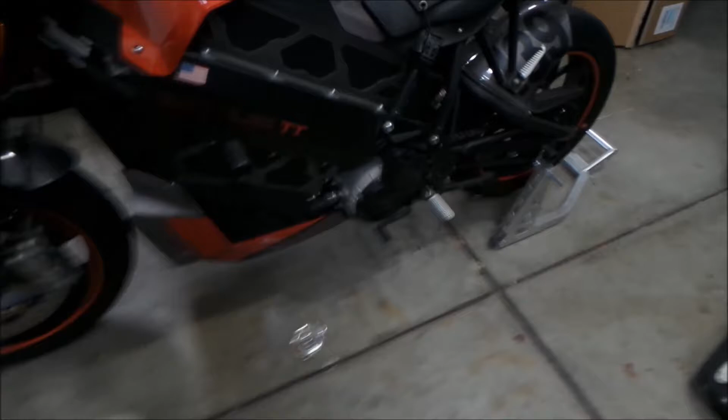The reason I want to just check the level and refill the bike is because my bike has sprung a little leak, leaking from around where the jack is right here underneath. Let me run my finger there... it's pretty dry actually. So the purpose of this video is to show you how to refill or check the level of coolant on the Empulse TT.

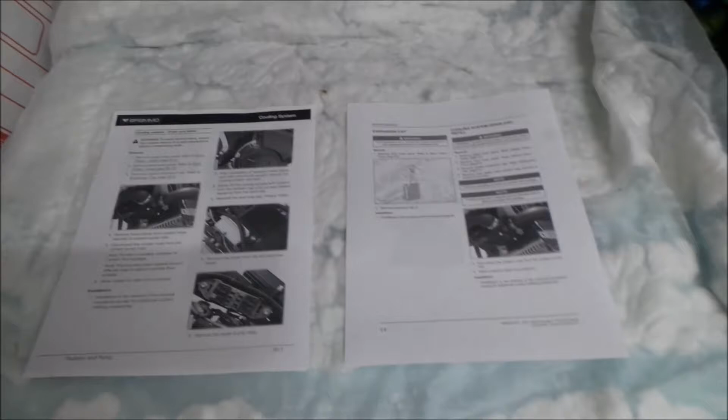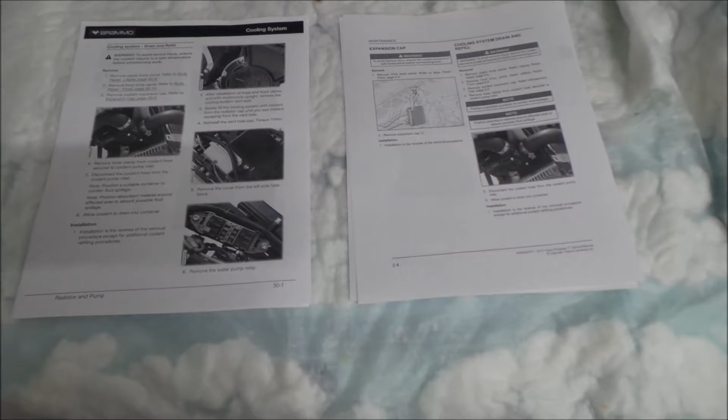So here I've got the Brammo and Victory Empulse service manual pages printed out for draining and refilling. I like the Brammo one better because they have actual pictures as opposed to diagrams. Interesting thing to note, I think this should be the same for both Empulses, the Victory and the Brammo. I'm pretty sure the cooling system is very similar, except for the location of the relay.

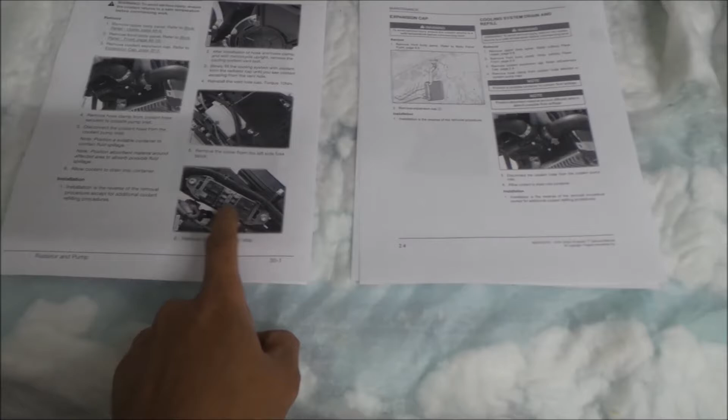I went through the manual, and I think the difference between the Brammo and the Victory is the location of the fuse block. The fuse block is on the side of the bike here, and on this one, the fuse block is on the top of the bike. At least I think it is, that's what it looks like.

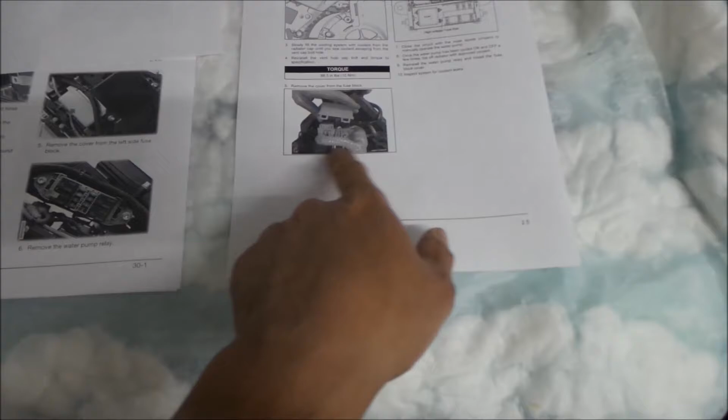Anyway, we'll figure it out when we remove the body panels. The instructions are not the best, I'll tell you that.

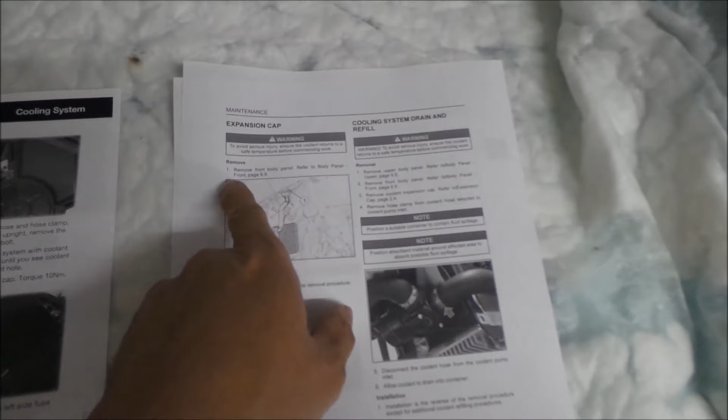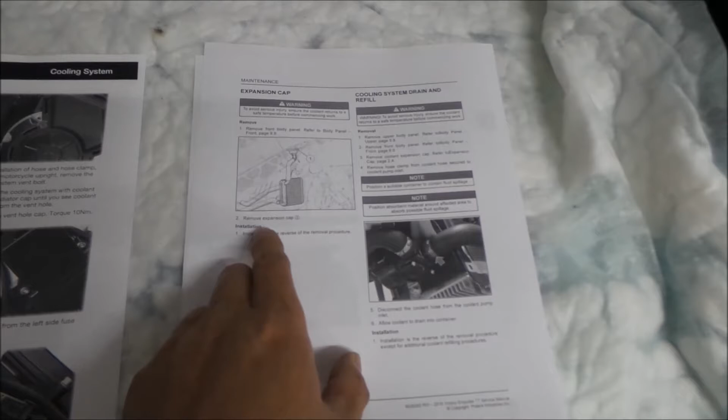The first thing I've done is put the bike on a rear stand, so the bike is level. That's what you're going to want to do first. Then the next step is to get to the expansion cap. That's actually the first part of the maintenance, and that's probably pretty much all we need to do, really just take that cap out and see how much coolant is in there.

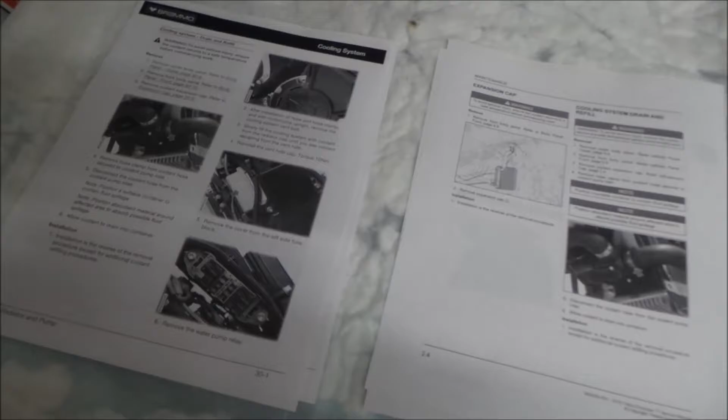And the Brammo manual doesn't tell you how to take it out. It's kind of like, it doesn't actually explain. That's a good question. Well, that's interesting, yeah, it actually doesn't tell you how to take it out. That's interesting.

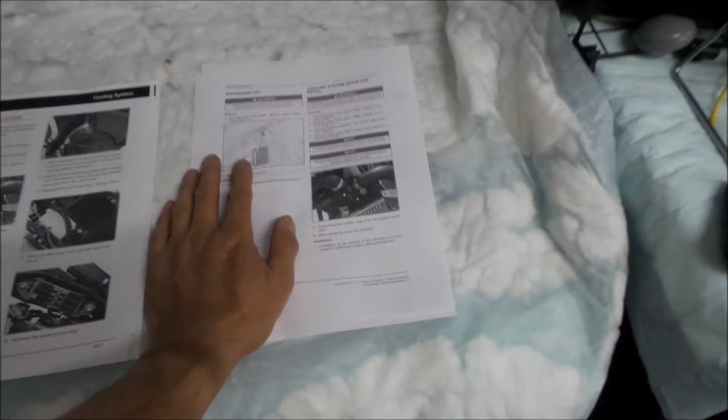Okay, anyway, that's why I printed out both of them, so we can look at them both. One of the things we're going to have to do is get to the expansion cap. So part of the drain and refill process, you've got to remove the coolant expansion cap. To get to the expansion cap, you've got to take the front body panel off.

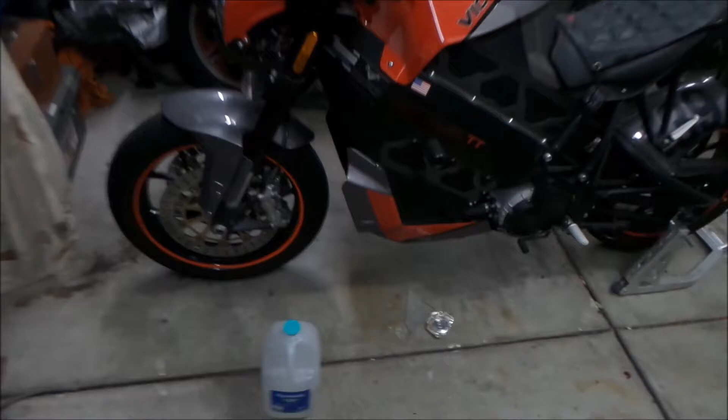I think the front body panel is this one... no, it's this one right here. I think to do that, you've got to take the lower one out, the belly pan. You've got to remove the upper and the front body panel. So that's what we're going to do first.

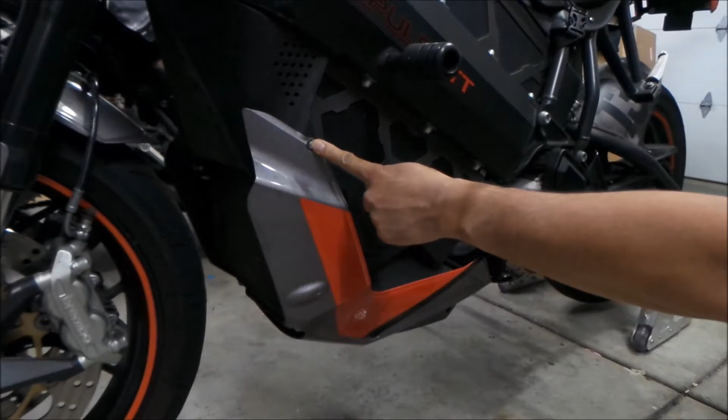To remove the front body panel, you've got to remove the lower body panel first. So I'll show you how to do that real quick. To remove the lower body panel, there are 4 screws: one in the front here, one underneath, and on the corresponding side there are 2 more.

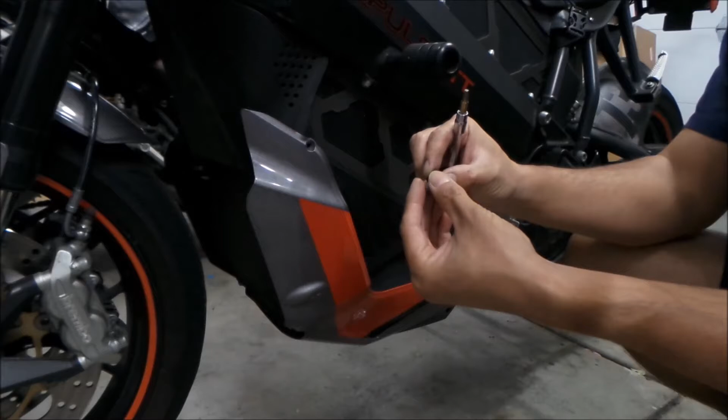I'm using a T25 Torx for this. The Empulse uses these weird bolt sizes and stuff. When you take one of the screws out, there's a little rubber washer that goes with it, so make sure you don't lose that. I probably shouldn't have removed it all the way. There's another one right down here.

Okay, here we are on the other side. Take off those corresponding bolts and screws on the other side. Careful, it may just suddenly fall too. There's also a spacer, and I think I lost it on the other side.

Okay, so there's this spacer here that's on the back of the front cover there, so make sure you don't lose that. I'm going to support it for this last screw so it doesn't just come crashing down.

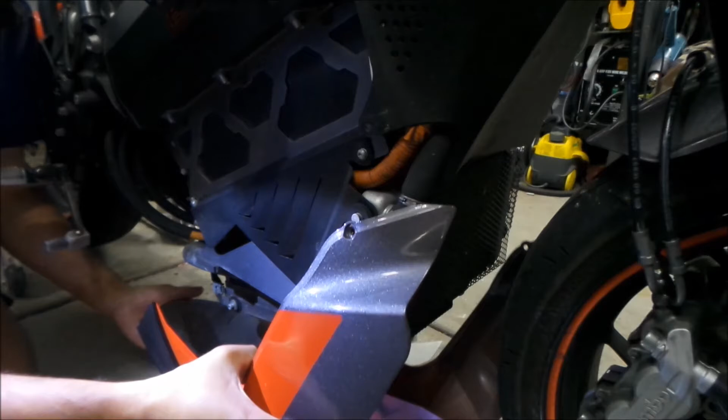Cover should come off. Oh, there's a bunch of stuff in there. This is a good opportunity to clean it out. Okay, I've removed the lower cover.

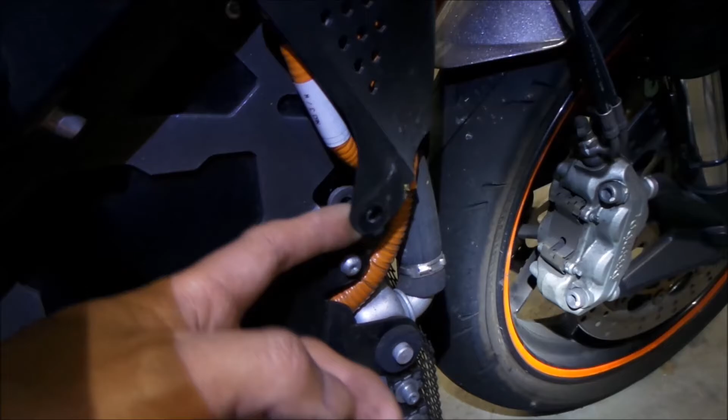So what came out are these two screws, one in the back, one in the front, or one is kind of underneath, sort of. And then there's this spacer. The spacer goes actually behind this panel right here. That's the front panel.

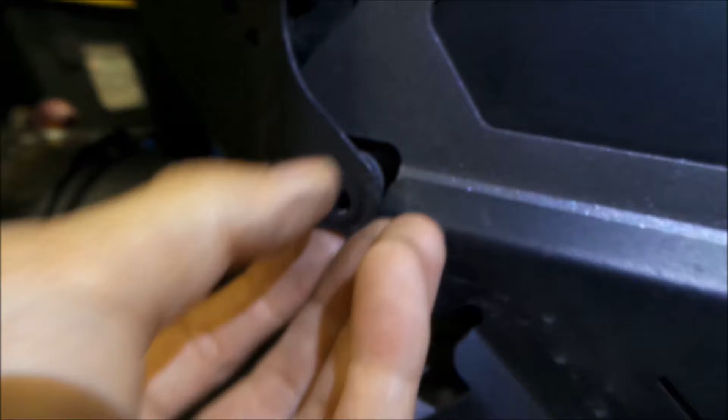So if we go to the other side of the bike, it should have one, right? Oh yeah, okay, this one is still here. So let me take that out before we lose it. So on both sides, that's what you should have: four screws with rubber washers, and then these two spacers that go behind this front part here.

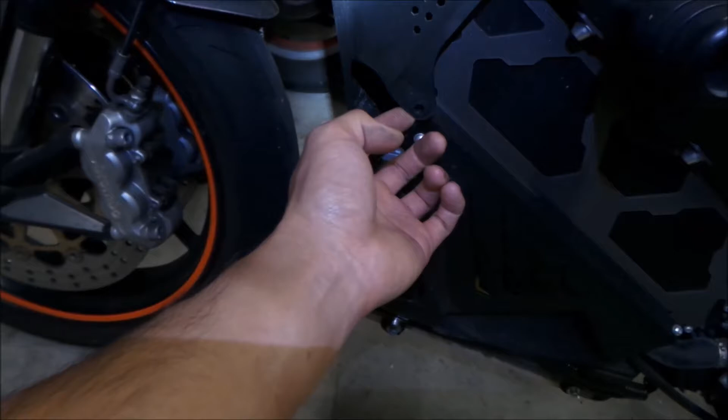Okay, and so we got the lower cover off, so now we can take the front cover off. This is the front cover right here. So now that we've removed the front, I don't know, this is like the lower cover or something, or the side lower side cover, or the belly pan is what you would call it.

This is what it looks like, by the way. It's kind of cool looking. Never actually taken it out of the bike, but you can see it's pretty dirty. A bunch of crap gets stuck in there, so I guess this is a good opportunity to wash it. And you can get a good look at the bottom of the bike, but let's finish taking it apart.

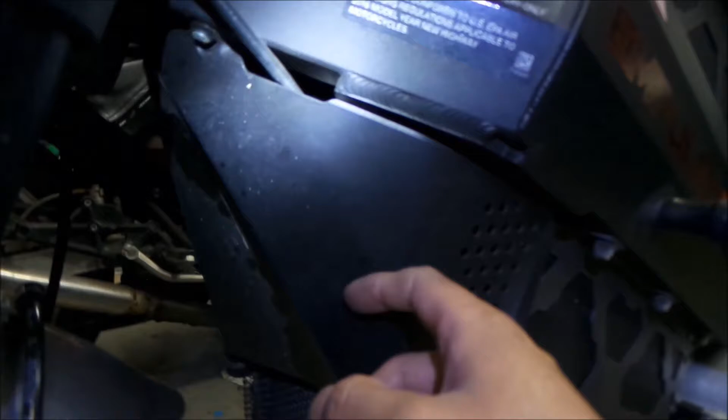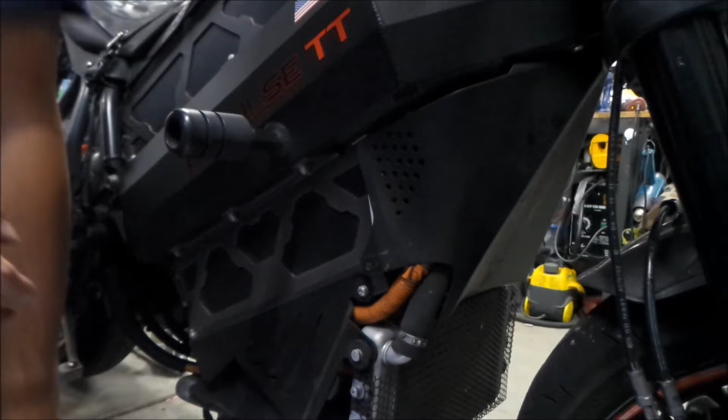Okay, so to take the front cover off, this black plastic piece here with the holes and stuff, we've got to remove these screws right here on the front. We've already removed these back ones, so all we have to do is remove this right here. Okay, we're gonna take our Torx screwdriver and remove that screw.

Boy, there's not a lot of room to work with anymore. My suggestion is use the screwdriver. Oh, this might be a different size. Oh no, okay. Kind of got it. This is kind of the wrong size, it's too long, so I'm just going to take the bit out. I really should invest in like a screwdriver set or something.

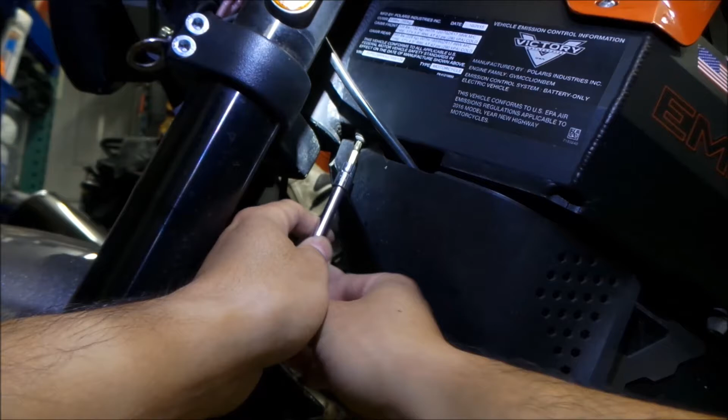Okay, that's one screw out. Let's go to the other side. So for whatever reason, this one is easier to get to, it's easier to find. So I'm just going to use a screwdriver to loosen it. Probably want to hold on to this.

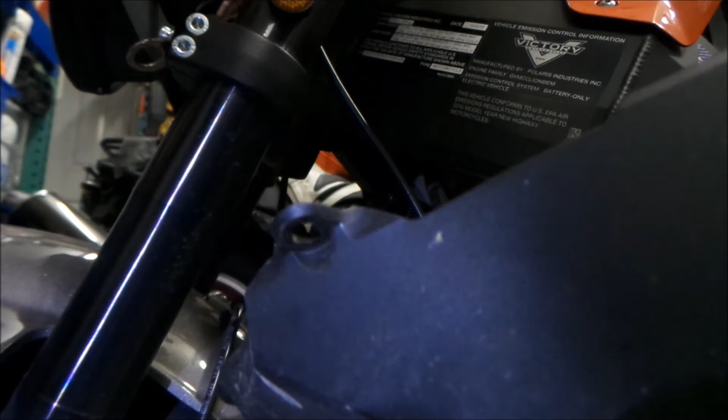Very carefully pull it out. Okay, there it is, it's free. Make sure you secure that bolt somewhere. So there's the front panel right there.

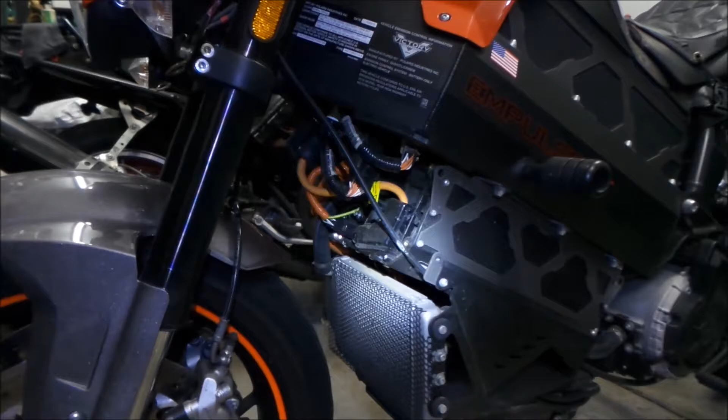Okay, so here we are. So this is, you've taken the lower panel off, and then we've taken the front panel, body panel off. So now we have access to the radiator cap, sort of, kind of.

There's all these freaking wires in the way here, man. I don't know how they expect you to get to it. Look at this thing, it's got like a plug at the end of it. There's a lot of rubbish going on here.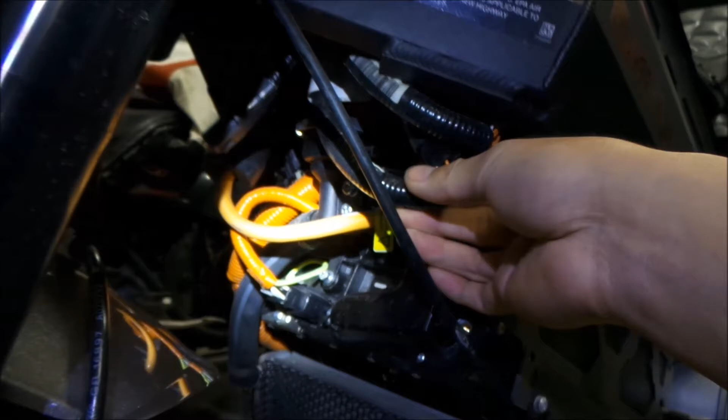But I'm thinking, boy, you're probably going to want to unbolt this. It doesn't say anything about unbolting this in the manual, but it's like I don't see any way to refill this thing unless you take this out and move it that away. Here, let's take a look at it from the other side. But it's like buried in there, it's literally almost inside the frame.

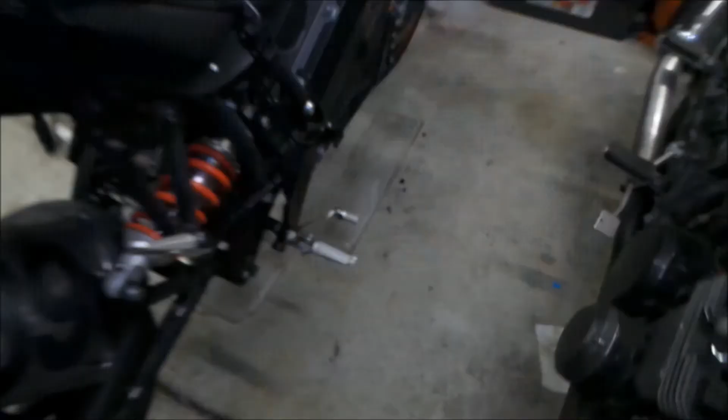Also, before I start fiddling around with the cooling system, I put some drip pans under the bike just in case something drips.

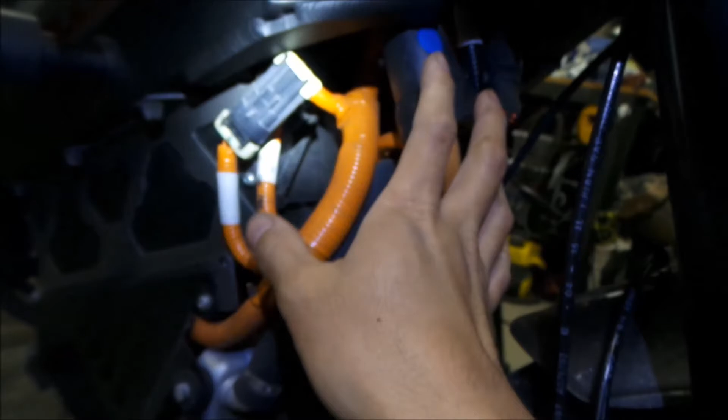Okay, so right here, there's that safety plug, which is way in the way. I think the best thing to do is just unbolt it from here and here. We're not going to be messing with the electrical system at all, so we don't have to disconnect anything, I think.

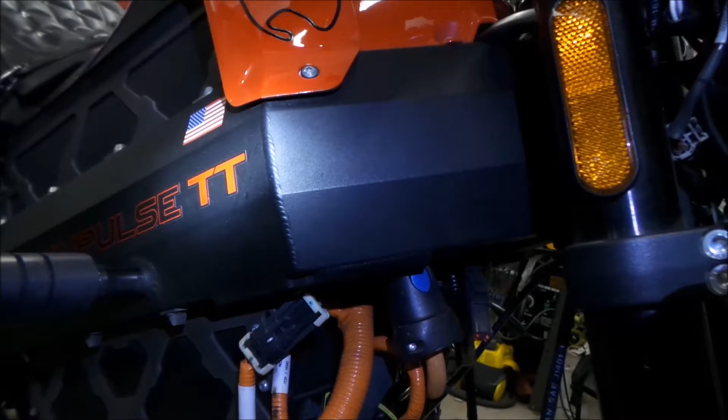So we got to take this cover off right here. To do that, I think we got to take the seat off. I'm going to skip around a little bit here - I'm just going to check the coolant level. I wish there was a way to check this without having to take all this stuff off. It's kind of annoying, but alright.

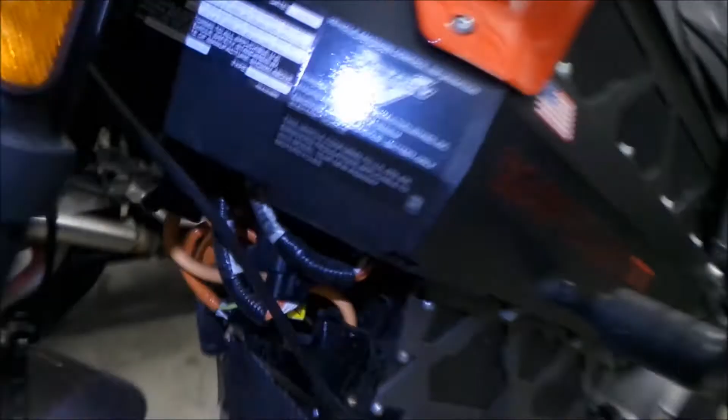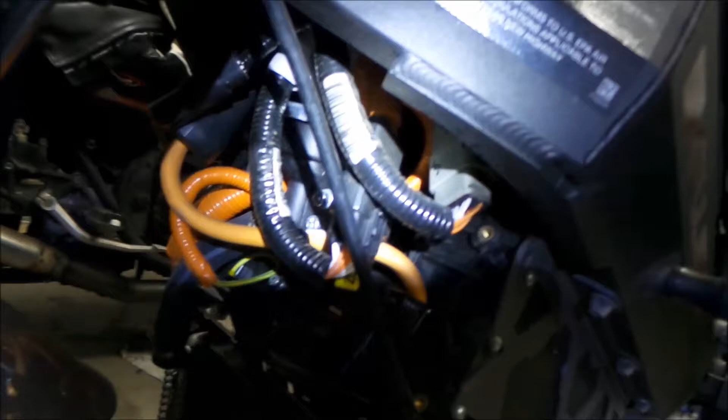So what we're going to do is unbolt the expansion cap, as it's called, right here. The expansion cap goes to the top of the radiator, so whatever the level is in the radiator's thing. It looks like there are two Allen bolts in there - I think it's like a 5mm. That's what it is, so I'm going to go ahead and unbolt this.

This is just the bracket that keeps it secure. I don't know how they expect you to refill this thing if it's back here, you know. It's not the most convenient of designs, I'll give it that.

Got two screws out, so the cap should be free. Hopefully we can just kind of- there's like an overflow thing right here, but there's no overflow bottle. It's a funny thing, I think we're going to move it out here. This hose is keeping it from- so annoying, okay let's just pull it over. Okay, that should be good, we should be able to fill it from here.

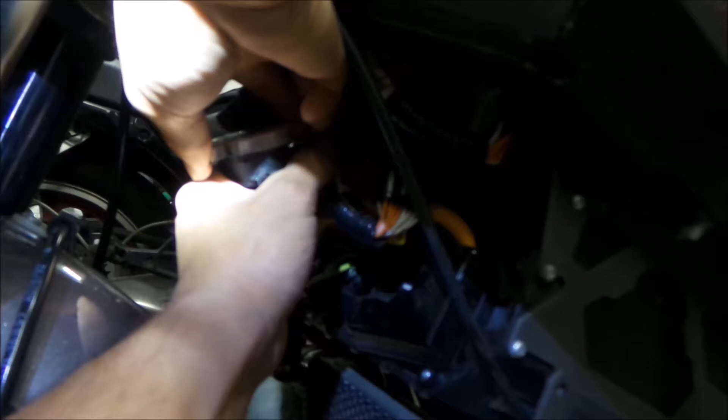Alright, so let's go check the coolant level first before we do anything else. So that's where it is, and I kind of just peeled it out over here. Hopefully this doesn't explode coolant all over the place when I open it.

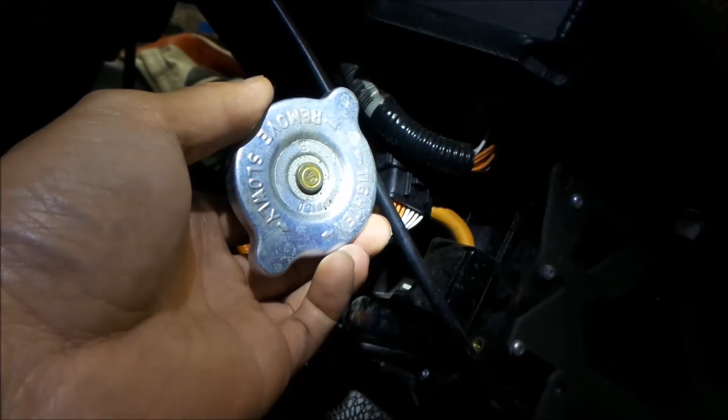Oh, you gotta press down and then turn it a little more. Okay, it looks pretty dry, looks like there's nothing in there. But here's the cap - remove slowly. Made in Mexico, it's a Stant cap by the way, I think it has an S right here.

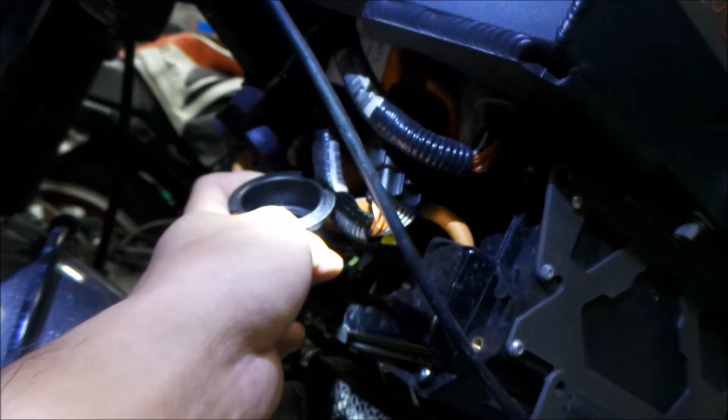Okay, so there's the thingy right there, and it looks like it's empty, okay? So I'm thinking we're probably going to want to bleed it and everything. So alright, before we start refilling it, we'll take the upper body panel off, okay? So it looks pretty dry, there's like nothing in there, yeah I don't see anything in there, but it's an expansion cap, okay.

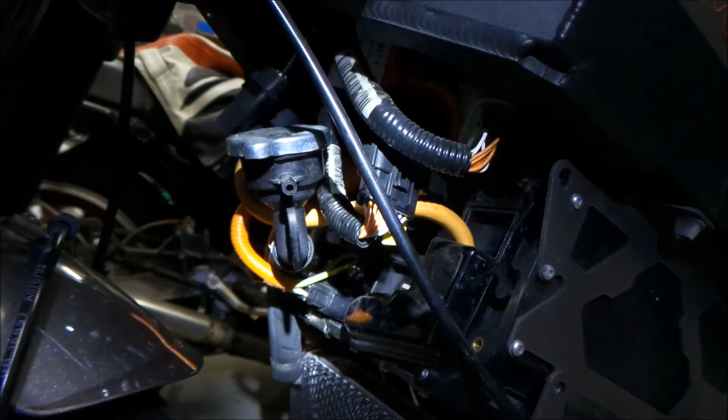So what we're going to wind up doing is refill it as per the manual, and then we're going to bleed the system, okay? And you do that with the water pump.

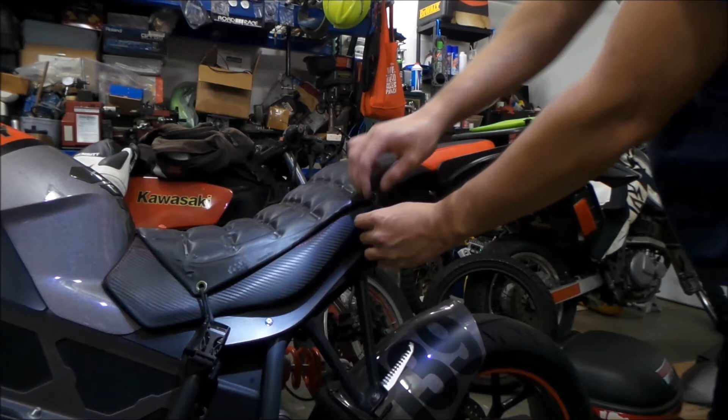Alright, so what we got to do next is remove the seat. Mine has this fancy seat cover, so I'm going to go ahead and remove that. Mine has all these kind of different accessories on it that your Empulse probably doesn't have. I'm going to remove the seat cover - probably won't need this when I go to the racetrack anyways.

Okay, now we're going to want to... I took the trunk off already too. They don't sell trunks for Empulses, so I imagine there's not too many out there among people with Empulses that have them. This is a custom made trunk.

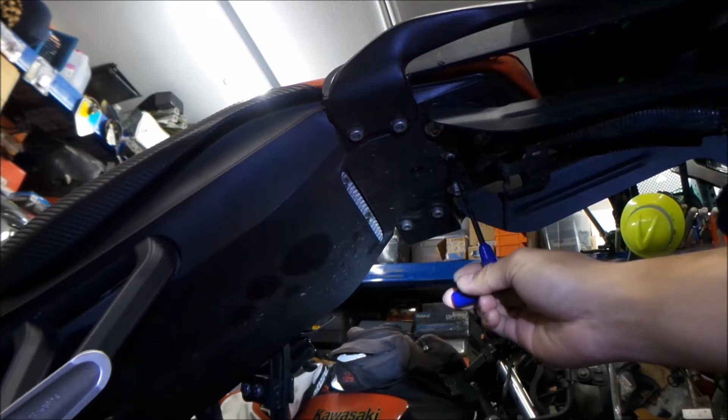Okay, to remove the seat, you gotta remove this bolt right here. There's a bunch of bolts, but there's one that's kind of in the center of everything. I believe that's the one for the seat. All right, with that removed, you should be able to lift the seat off. Set that someplace safe.

Okay, so now we can remove the upper body panels. Marvel at what's underneath the seat - it's a big charger. Okay, I got a handy dandy driver tool. So to remove the upper body panel, you've got to take these bolts out. This one here, and this one here, and I think there might be one underneath. It's been a while since I've taken this out - I've taken it out before, but it was a while ago.

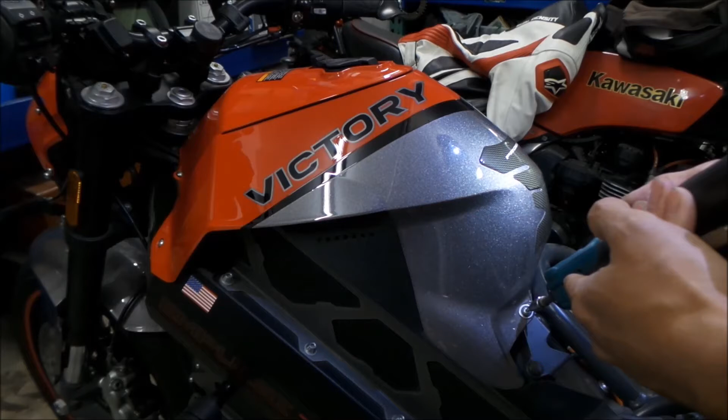Take out this one over here. And there should be another one on the other side. I'm just going to go ahead. So this back cover should come off now.

Okay, so we got two more to take out. There's one here and one on the other side of this, okay? And make sure you're taking the little rubber washers out with it too.

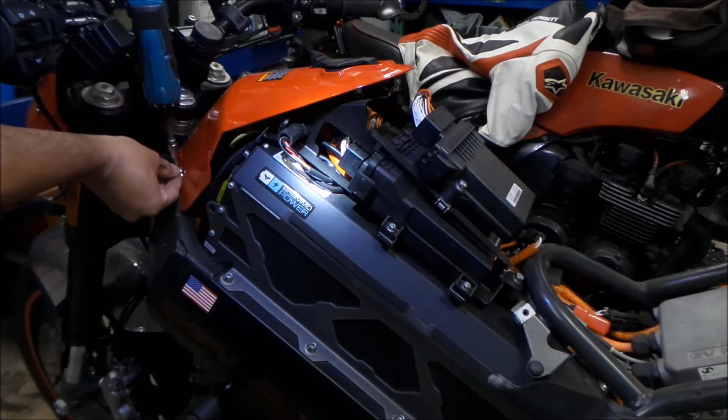Kind of annoying, my bit or the socket kind of touches the body panel. But okay, so that should lift out now. Okay, so now we got access to the fuse.

This is the important part. That's why we have to take all this off, so we can get to the fuse. It's really annoying trying to get to anything in this bike.

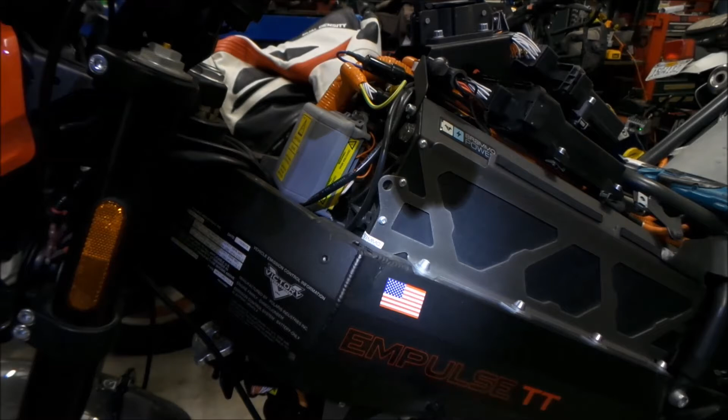Okay, all right, so let's open the fuse box up. So you can see it's right there in the front of the bike. I'm not sure if on the Brammos it's over there. I think on the Brammo it's like somewhere here on the side, in this area here, but on the Victories it's on the very front right here, in front of the upper battery right here.

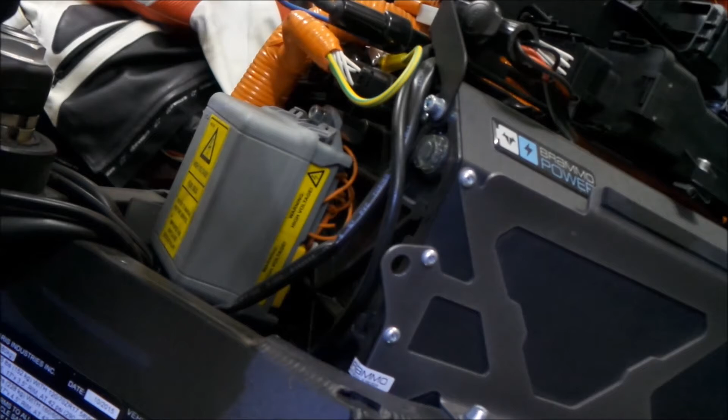Okay, so there's 4 tabs you got to pull up on. I know my hands are in the way, but it might help if you use a screwdriver. I know, like poking metal, moving metal objects around these high voltage wires... oh, there you go. Okay, so once you get the top ones off, you can kind of finagle the ones off the bottom. Oh my God, it is so tight in here. I just cram everything in here.

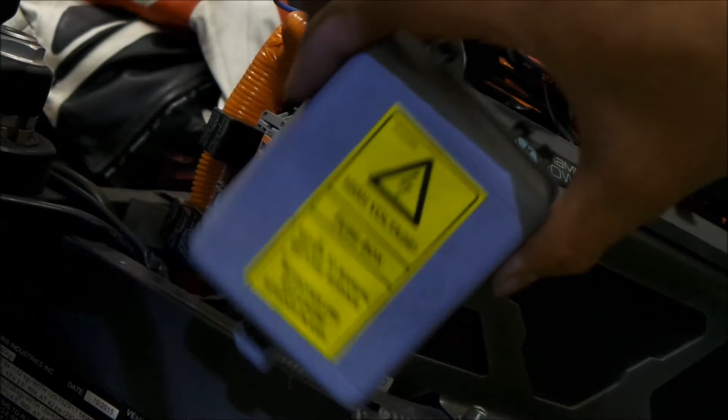Okay, so this is the fuse box cover right there. So here, there's a relay here. We're looking for one relay. Okay, so when we get there, I'll show you what to do. But that was the reason we took all the body panels off, was so we can get to that relay over there. Okay, all right.

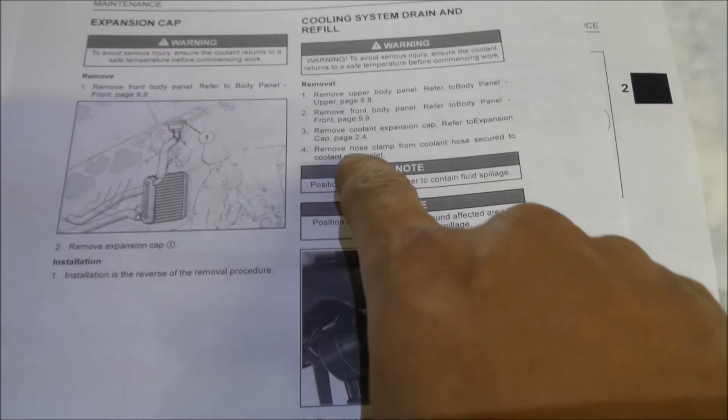So we're gonna go ahead and start filling the cooling system up. Okay, so we removed the upper body panel, the front body panel, and the coolant expansion cap. And then to drain it, you got to remove one of the hose clamps where the coolant pump is. Where's the coolant pump? That's a good question.

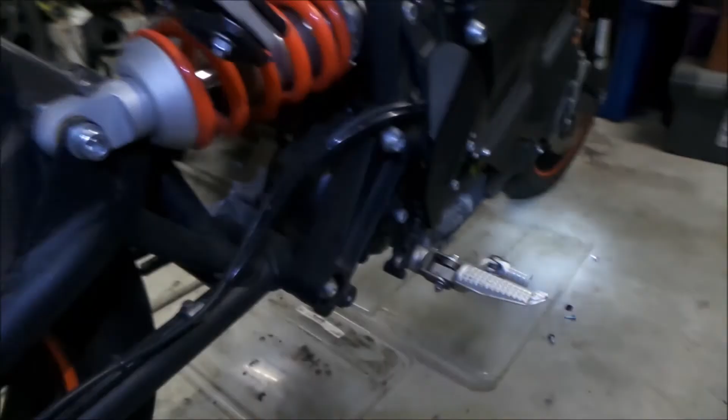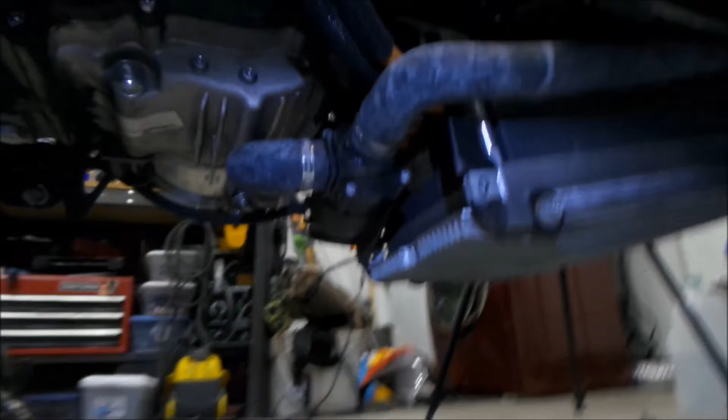Okay, so for future reference, if you would want to drain the coolant off your bike, you would do it by taking this hose off right here, okay? This one - the one that comes out like this, kind of like a turbo. It's a water pump, but it looks like a turbo to me. Basically, that's what a turbo is - it's an air pump. Yeah, you would undo this one.

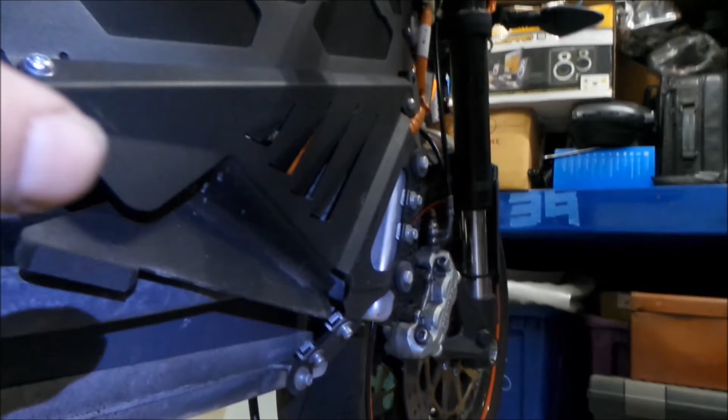You would take this out and then let all the coolant just explode out, because where that actually goes is the lower radiator, the bottom part of the radiator. So all the coolant would just puke out of there, pretty much.

Okay, so I don't know how to undo - I don't know how to work with these clamps. These are some weird kind of clamps. When you do take this out, or when I do take this out, I'm going to replace it with a regular worm gear kind of clamp - the more common clamp. That's what I'm going to say.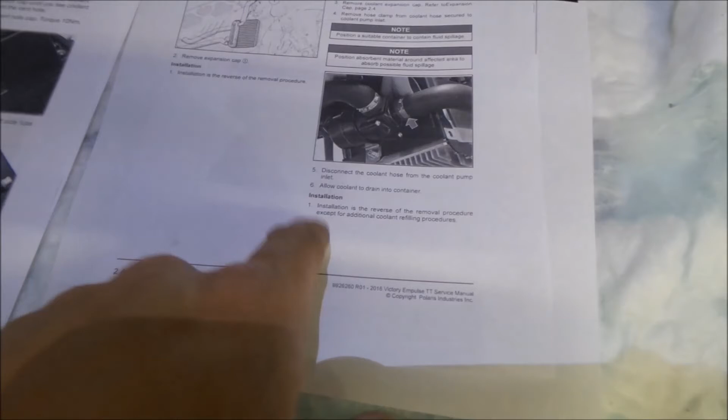Okay, but we're not going to mess with that today. My purpose of doing this video is to fill up the coolant. Since we didn't drain the coolant, we're going to skip to the next part. Installation is the reverse of the removal procedure, except for additional coolant filling procedures.

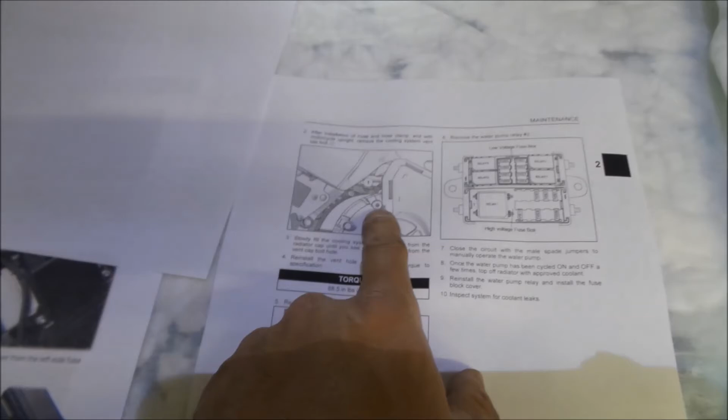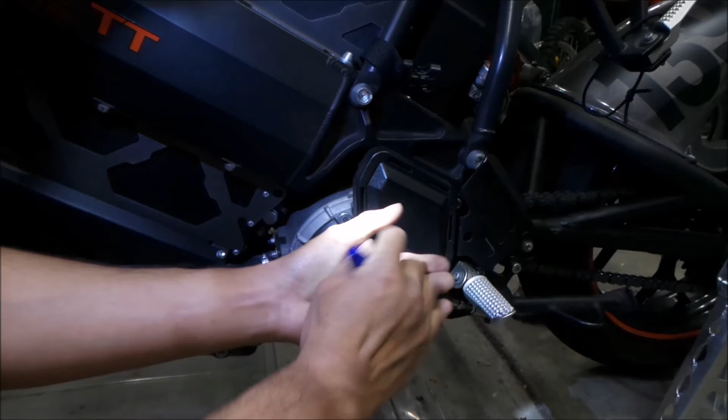So after you put the hose and clamp back in, remove the cooling system vent cap bolt. That's bolt number 1 right there, so we're going to want to remove this bolt. I think it's a 5 millimeter. I would use a T-handle, I got my T-handle here. Let's take this cap, this vent cap, that's what it's called.

Coolant may come out of it, so be careful. Oh, a little bit of coolant came out, it's green coolant. I was thinking of putting Prestone in mine, but it looks like it's full. Yeah, that's what it looks like, it's full because I see coolant on the top. So maybe we don't really need to put coolant in there.

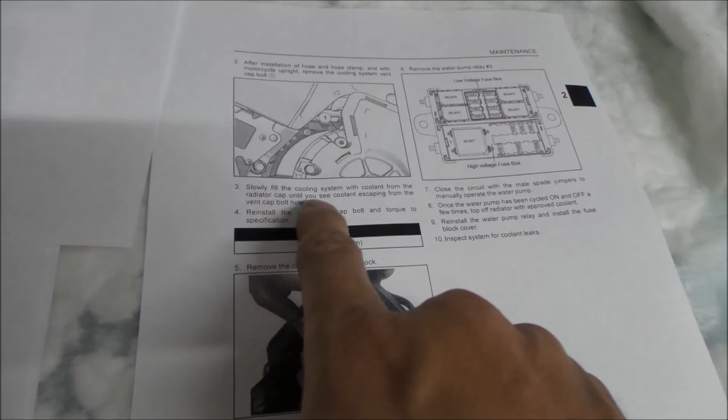Okay, so we removed the cap, there's what the cap looks like. Put that someplace safe. So we're here on step 3: slowly fill the cooling system with coolant from the radiator cap until you see coolant escaping from the vent cap hole. Then you reinstall the vent cap bolt and torque to specification.

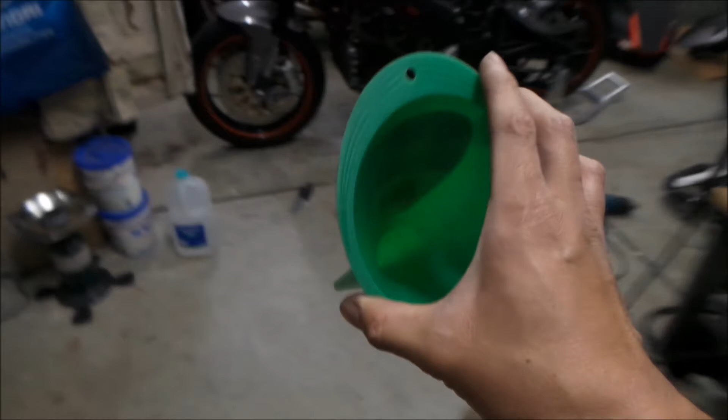So I've got a funnel here, this is what I'm going to use to get the coolant in there. I don't know how they expect you to get the coolant in when it's up in there, you know.

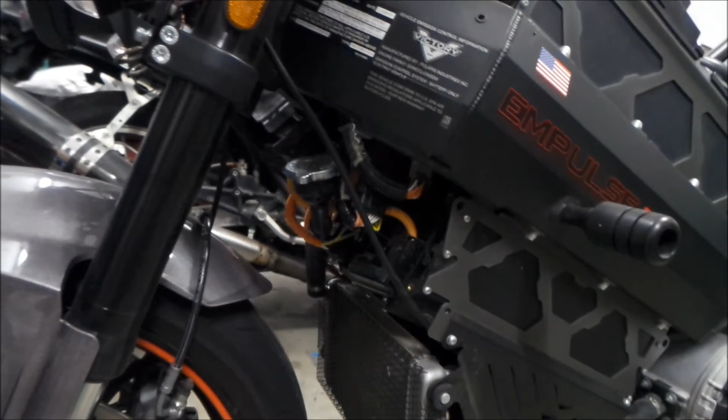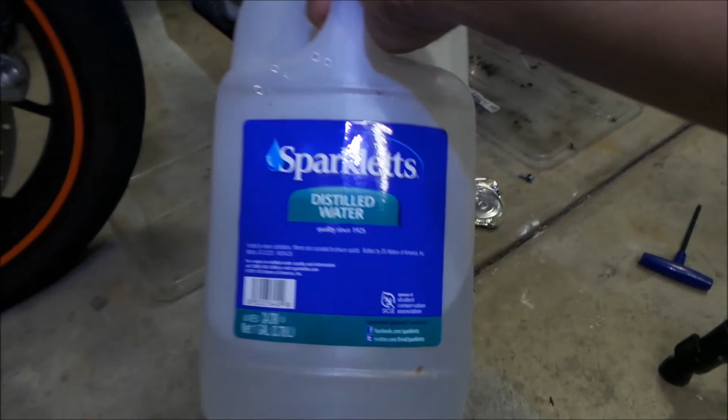Yeah, so here's what we're going to do. We're going to take the cap off, put the funnel in there, I got to make sure and clean this a little bit. And I'm going to pour some distilled water in there. So make sure, if you're just going to put water in there, make sure it's distilled water. Ideally you should probably be putting 50-50 coolant in there, but it's okay if we're just topping off with water. But make sure it's distilled water, because it's got to be super clean.

So we're going to go fill this up, and then when water starts to seep out of there, we'll put the bolt back in, the plug, and then that's pretty much it, we're almost done.

Okay, so I've gone ahead and rinsed my funnel out. I'm going to go ahead and take the radiator cap off again. Oh, it's really hard to, we gotta press down on it hard. Okay, bone dry in there, so I'm thinking we gotta add some coolant.

I'm gonna go ahead and put our thingy into there, or looks like I'm just gonna have to hold it. I can't... Yeah, if you got some kind of hose or pouring dealy, like a bottle with one of those little squirters on it, that would probably come in handy. I'm just gonna go ahead and pour it in like this.

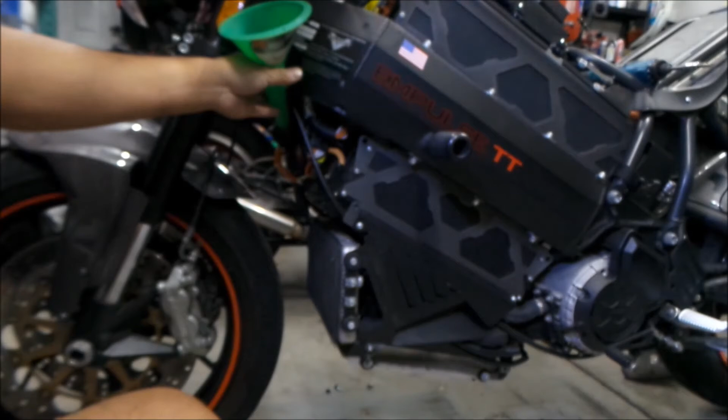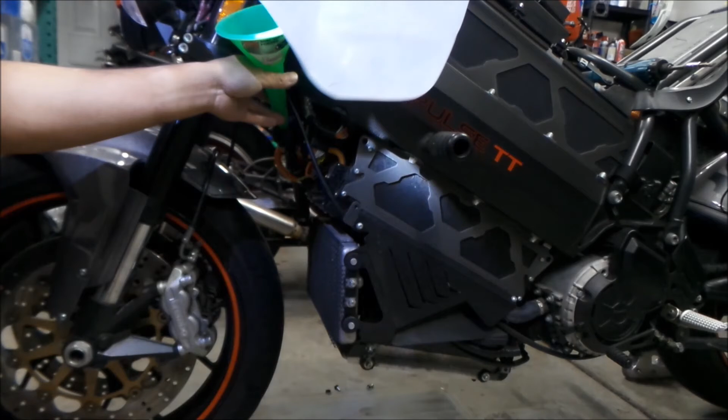Alright, I'm gonna pour it, and then we're gonna watch the plug over there. I'll let you know if I see anything come out. Oh yeah, it's already leaking, it's leaking. I think it's full, there's nothing wrong with it. I think there's a bunch of coolant coming out of my bike now.

Okay, so that should mean we should go put the plug back in. I don't think that we have to... Okay, so plug's back in, make sure the little gasket's on it. So it did have coolant in it, so I just forced a bunch of coolant out of it.

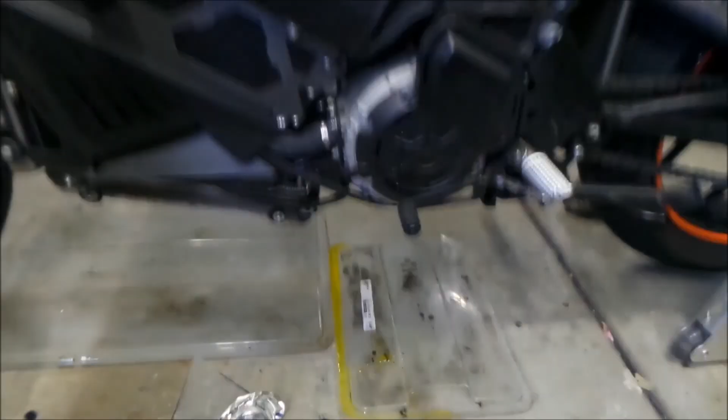So the next step is to put the bolt back in and torque it. The torque is 88 inch-pounds, or 10 Newton meters. I already have my torque wrench all set up for it. Okay, that's it, it's pretty close. And then what's the next step?